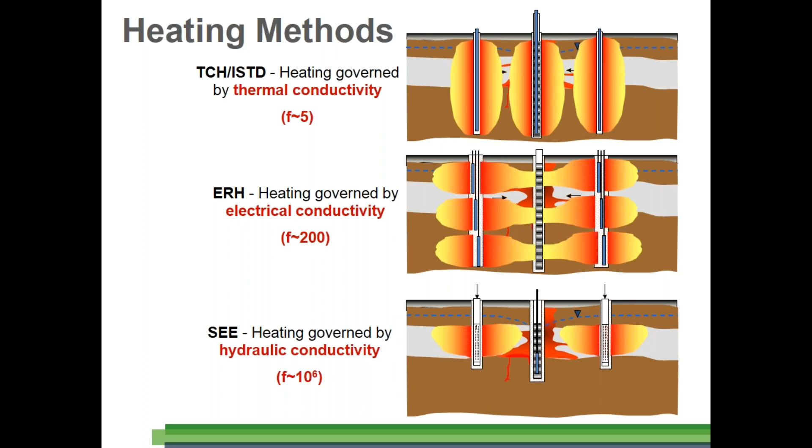Last, we have the steam enhanced extraction technology, where we are injecting steam to deliver the energy into the subsurface. And obviously, the permeability of the soil is important when we use that technology. As you all know, the hydraulic conductivity can vary quite a bit between the different geologies, so typically we're looking at variations in the order of several decades. So for the steam enhanced extraction technology, it's even more important that we fully understand the subsurface.

So that was the subsurface portion. Now we're looking at what other supporting elements are in play when we look at a thermal in situ treatment system. The well field is connected to a treatment system, an above grade treatment system that basically treats the vapors and liquids extracted from the subsurface. The treatment system can either be based on a GAC-based system, a GAC regen system, or maybe a thermal oxidizer if the mass is high.

The energy typically comes from the electrical grid, especially for ERH and thermal conductive heating. When we are utilizing the steam enhanced extraction system, the boiler typically runs on natural gas, or diesel if no natural gas is available at the site.

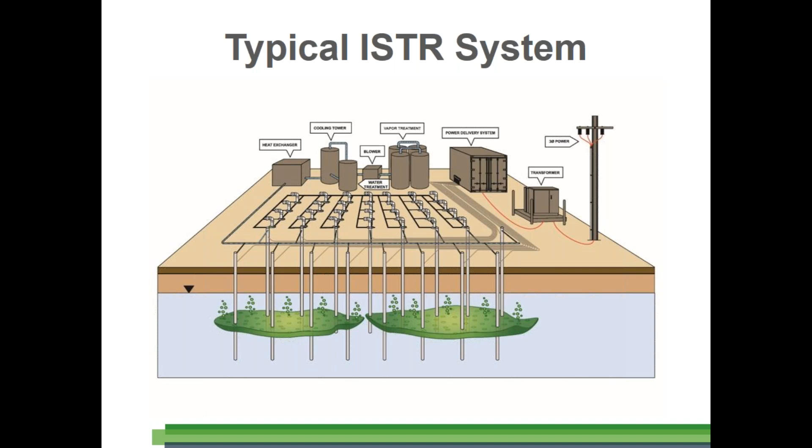The next couple of slides will briefly outline what kind of wells we are dealing with at thermal sites. The first one is the thermal conductive heating heater boring. The thermal conductive heater element is installed in a typically 3-inch carbon steel can. The annular space around the can is backfilled with grout. Sand can also be used, but typically we use grout because when we work on thermal sites, the mass are typically pretty high as well, and that's where the technology is best. We definitely don't want any migration of NAPL along the borings.

For the thermal conductive heating technology, we have an option to basically fully plug the annular space, and that's what we do when we can. Boring diameters are typically 4 to 7 inch, depending on the state regulations and the setup, and well spacings are typically in the order of 12 to 17 feet. Sometimes we extract from co-located vapor extraction screens located right next to the heaters, but most often it's actually from separate extraction wells drilled and installed between the heaters.

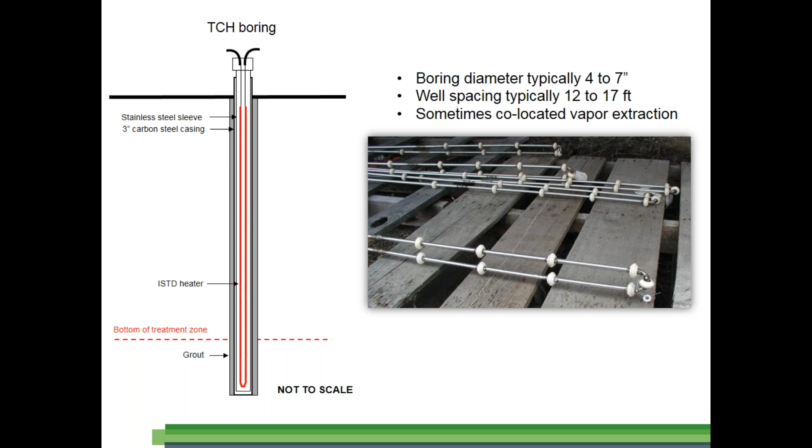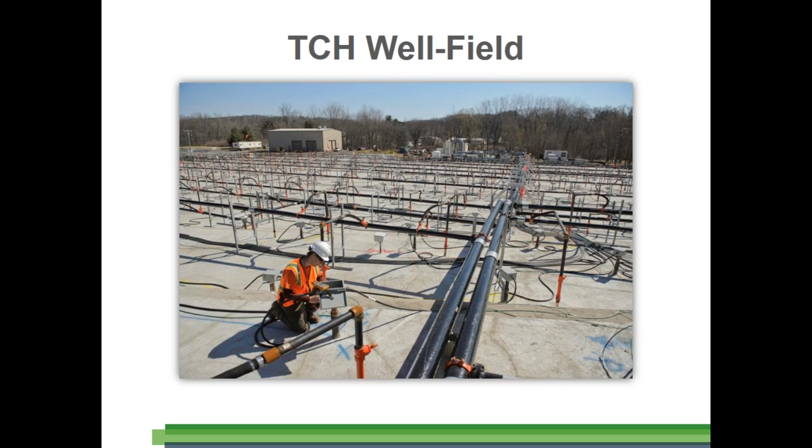The next slide shows a well field. This is one of the bigger well fields, a thermal conductive heating well field. What you see here is the orange wells are the extraction wells, and in between you have the heater borings. The manifold piping, of course, connects the well field to the treatment system.

Moving on to the next technology, the ERH technology. Here is a figure of a typical ERH boring. In this case, we are showing two electrode intervals: the upper electrode, which also serves as an extraction point, and the lower electrode, which is basically a copper plate installed in a graphite or steel shot annular space material. So the ERH wells are designed to have a big surface area such that the power can get in contact with the surrounding soils, and that's exactly why we have the graphite or steel shot surrounding the electrodes.

Boring diameters are typically quite a bit more than for the TCH wells, in the order of 10 to 12 inch, and the well spacing is in the order of 14 to 18 feet in the typical application.

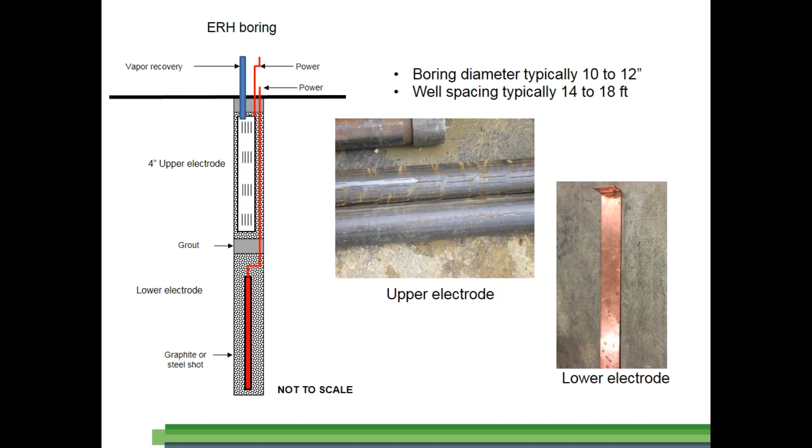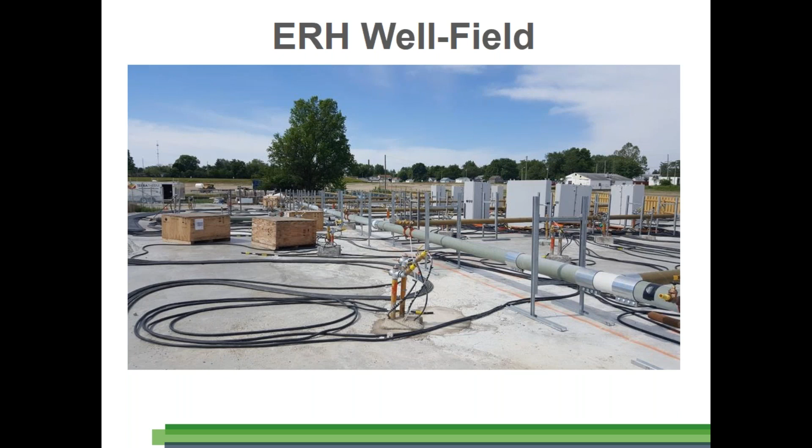This is a picture of an ERH well field, and you may realize it's not very different from the TCH well field. We still have cables going to the ERH electrodes, and we still have manifold piping to connect the extraction wells with the treatment system.

The last technology, the steam enhanced extraction technology, relies on us being able to inject steam into the subsurface. Typically, the steam is injected at very specific injection intervals that we model to fit the site. If a site is deep, we need several injection intervals as well. When that's the case, we try to install the injection screens in separate boreholes, simply because we don't want the different injection screens to short circuit in the same borehole.

The boring diameters, when utilizing the steam enhanced extraction technology, are typically between 4 to 6 inch, and the injection screen itself is typically in the order of 2 to 4 inch. When it comes to well spacing, it can be a lot higher when utilizing steam enhanced extraction technologies. We typically start at a well spacing of 20 feet, but we have been as high as 60 feet, and actually even up around 100 feet at certain sites.

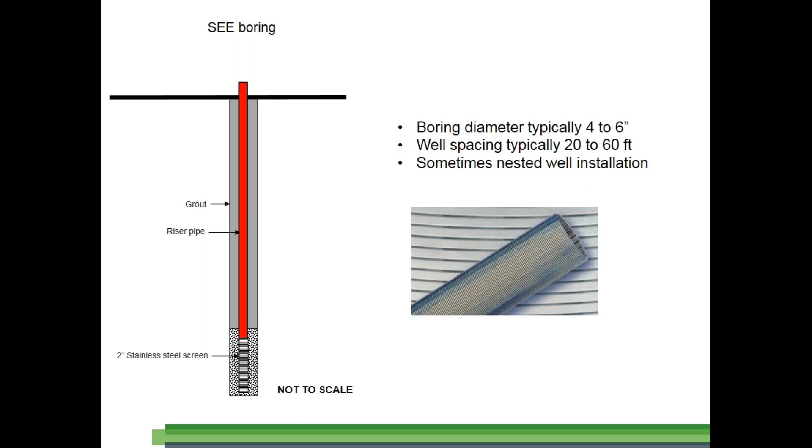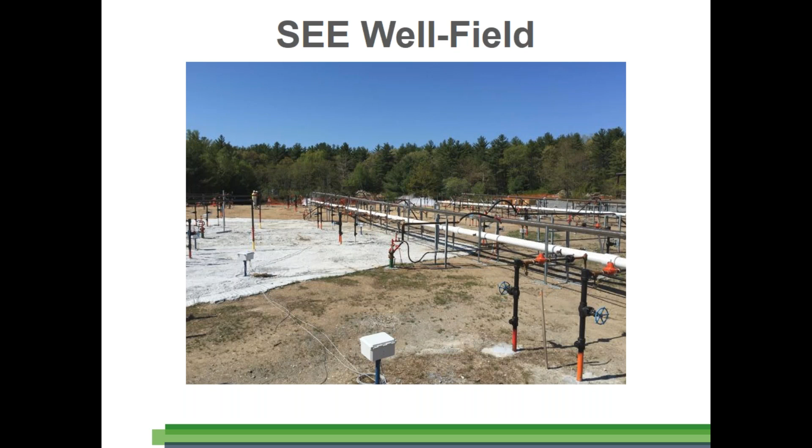This slide shows an example of a steam-enhanced extraction well field, and the orange wells in this case are the steam injection screens with a little orange steam regulator on each of them. In between, we have multi-phase extraction wells that are connected to the manifold piping. And then, other than the heating wells, we also have extraction wells.

So for the ERH and TCH technologies, we sometimes, as I mentioned before, extract directly from the borings, but more typically, at least for the thermal conductive heating technology and for the steam enhanced extraction technology, we are extracting vapors and liquids in between the heater borings.

To the very left, we have a typical multi-phase extraction well, typically constructed out of a 4-inch screen with a pump at the bottom to extract liquids, and then we are applying a vacuum to the entire well to extract vapors. MPE wells, we typically install in an 8-inch borehole.

When it comes to vapor extraction wells, they are basically the same as a multi-phase extraction well, except that they are smaller in diameter. Typically, we select 2-inch screens and risers, but otherwise it's the same, just without the pump.

And last, we have temperature monitoring points at all our thermal sites. Those are installed in a 1.5-inch carbon steel pipe. Around the pipe, we put high temperature grout such that there's no temperature smearing up along the well, and such that there's a good connection to the surrounding subsurface.

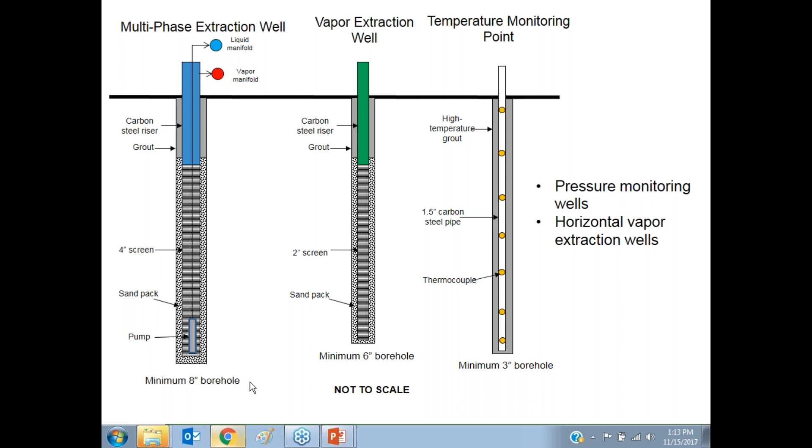So basically, four methods of drilling we're going to talk about here that will set a baseline for our case studies we'll talk about later. Most of these methods are pretty common with you folks, I'm sure. We've got DPT that we'll touch on briefly, air rotary sonic, also known as rotosonic drilling, and then another option is vibratory hammer drilling method that we used at one site in New Jersey a few years ago.

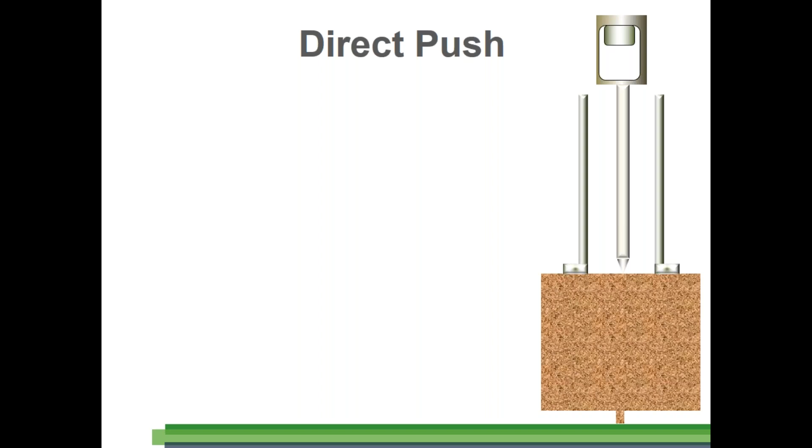So direct push, again, I'm sure most of you folks are familiar with this process. It's a flush threaded casing, pushed with a static hammer, or a static weight or percussion hammer through the subsurface. It's usually advanced, at least for thermal purposes, in support of TMP installation. So we're normally advancing a 3.5-inch diameter casing or 4-inch through the subsurface. There's an expendable point at the bottom of the casing that forces the displaced material into the formation.

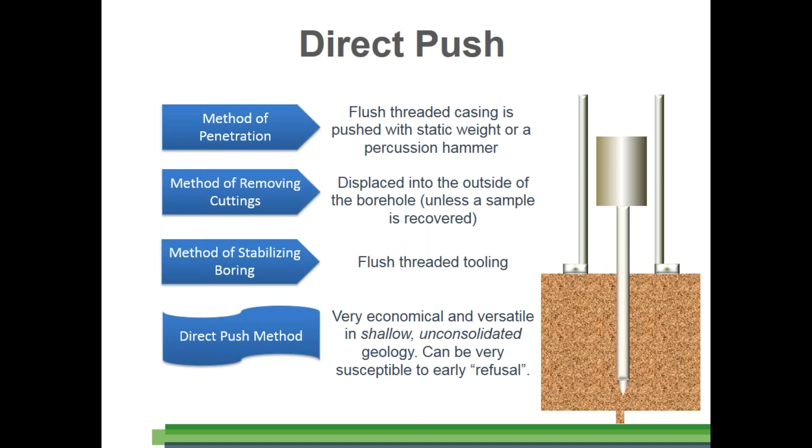And again, it's flush threaded casing, so whatever component of the thermal tooling we're setting is installed inside of a temporarily cased hole. It's very economical and versatile, as everybody knows. Geoprobes are relatively cheap compared to other methods. Unfortunately, some people may disagree, but they're most often used in shallow, unconsolidated geologies. And depending on the rig, they can be susceptible to shallow refusal.

Here's a couple photos of some DPT rigs. We've got the Geoprobe 8040 on the left and Geoprobe 78 series on the right. These are two of the rigs that we would typically use when we're asked to install thermal components. They are beefier rigs. They can both push 3.5 or 4 inch diameter tooling, which is the size that we would need.

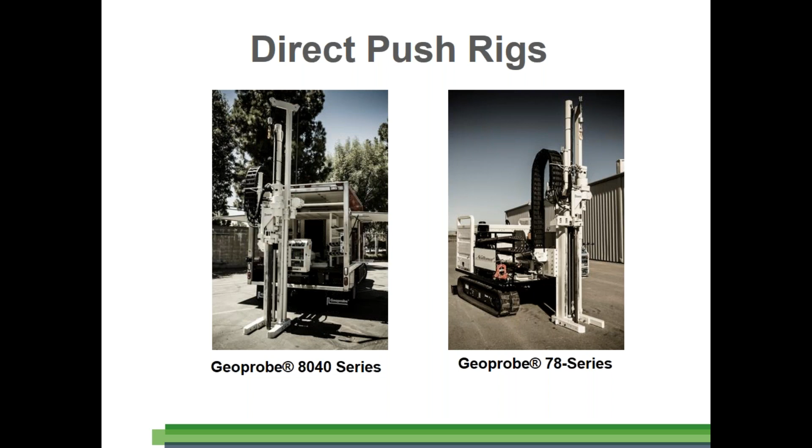Hollow stem auger, again, I'm sure you folks are typically familiar with this. You've got auger bits that claw through the formation. Formation material is brought to the surface via the auger flights. I usually have someone at the surface shoveling that material into a 55-gallon container. And the auger flights are hollow, so it's that hollowness of the augers that allows us to install subsurface thermal components.

The diameter and depths are dependent on torque as well as geology. Usually for ERH sites, we're typically advancing 12-inch diameter OD augers, which are pretty large, and they tend to be a little bit depth limited. So I always get a little leery when folks ask for 12-inch diameter augers over 30, 35 feet, depending on geology, of course.

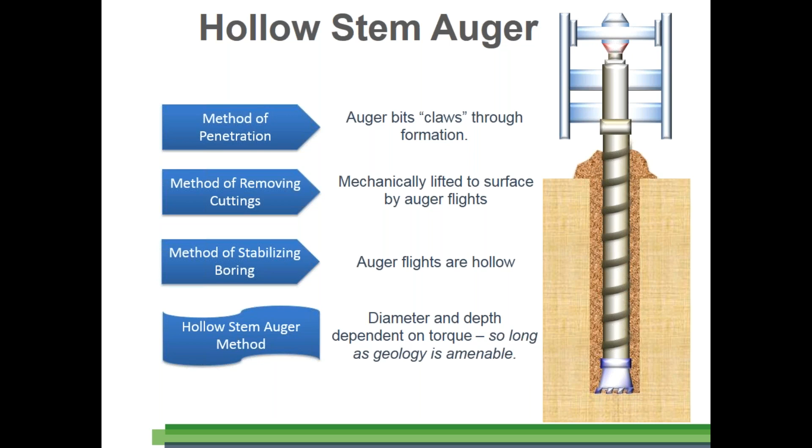Here's some standard auger rigs. They come truck-mounted and track-mounted.

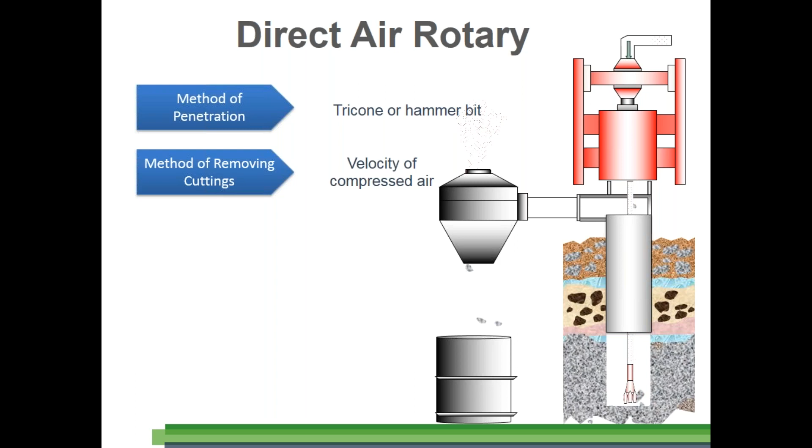Direct air rotary is another method that we typically use, obviously for rock remediation sites, thermal sites. Tricone hammer bit is advanced through the bedrock, and cuttings are brought to the surface via an onboard compressor or standby compressor. The compressed air brings the formation material to the surface, where it's sent through a cyclone or discharged directly into a roll-off container, 55-gallon drum.

The method of stabilizing the borehole is inherent to the stability of the geology, right? So we're not typically using air hammer to drill overburden material. It's usually only for bedrock, with the exception of some other air rotary methods used out west. One of those methods would be air rotary casing hammer, although ODEX is another casing advanced system that's occasionally used here in the Northeast.

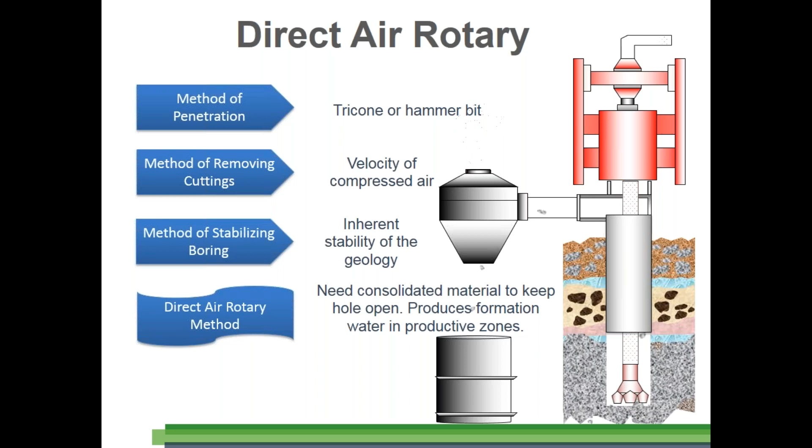Need consolidated material to keep the borehole open. That's sort of implied with the bedrock nature of the drilling. It does produce formation water in productive zones, so if you're drilling in rock along the coastal plains, you'll likely get a fair amount of water generation.

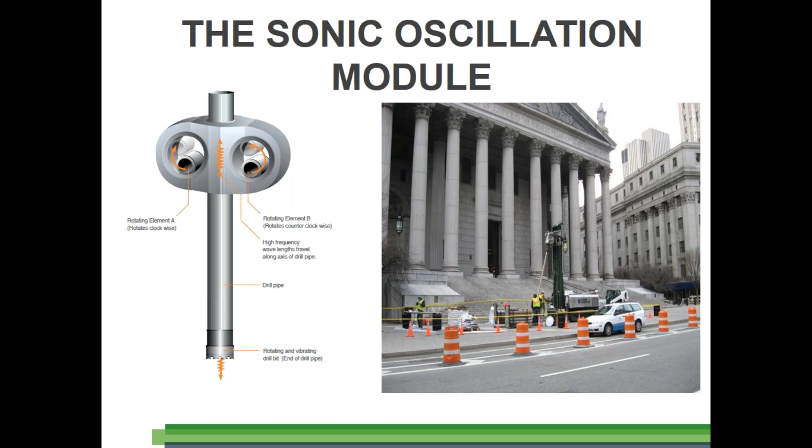That resonance is typically what allows the sonic tooling to advance through boulders and cobbles and material that typically causes refusal for augers, probe rigs, or other conventional methods.

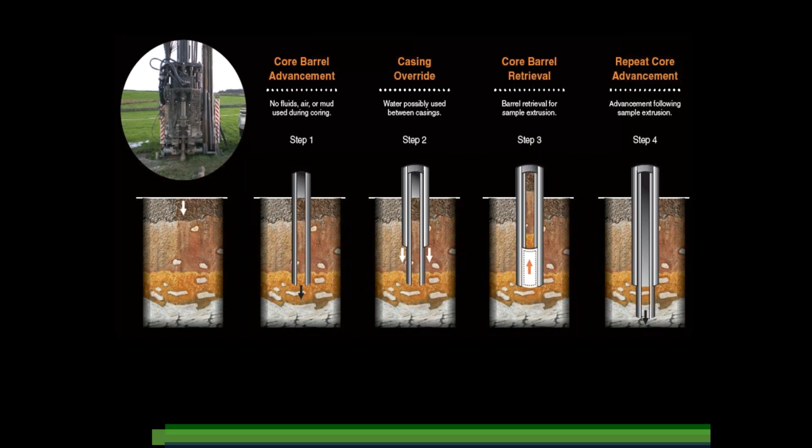It's a two-step process. You've got a core barrel that's advanced in 5 or 10 foot long runs, and then it's overridden by a temporary casing. The core barrel then comes out, or is pulled out of the surface, and is typically extruded into a polyethylene liner. Then the process is repeated. So you've got a core-case process.

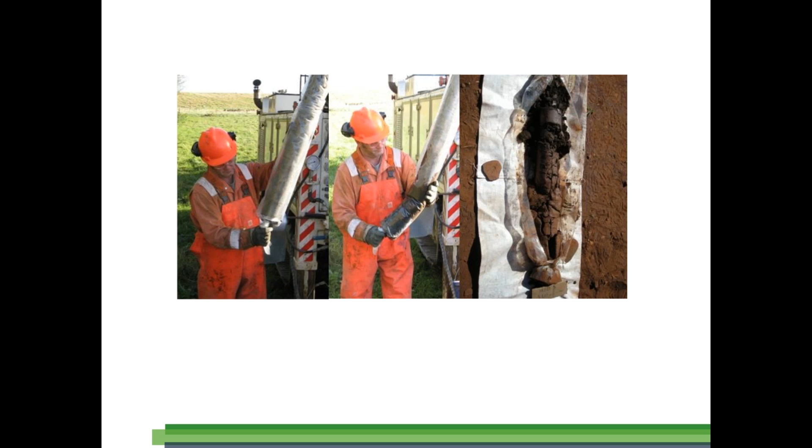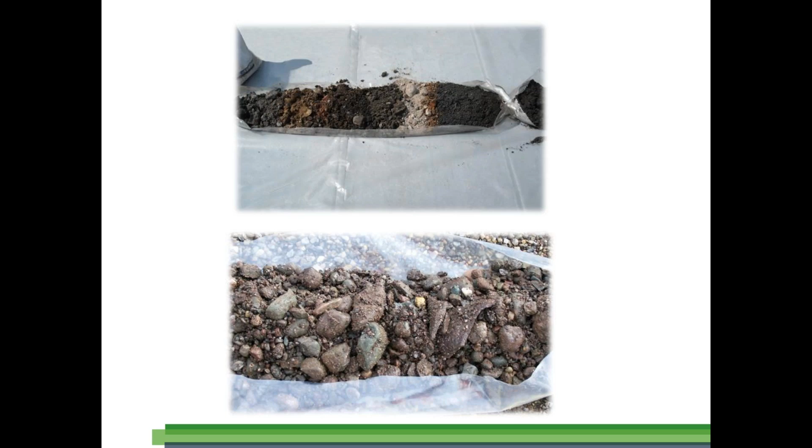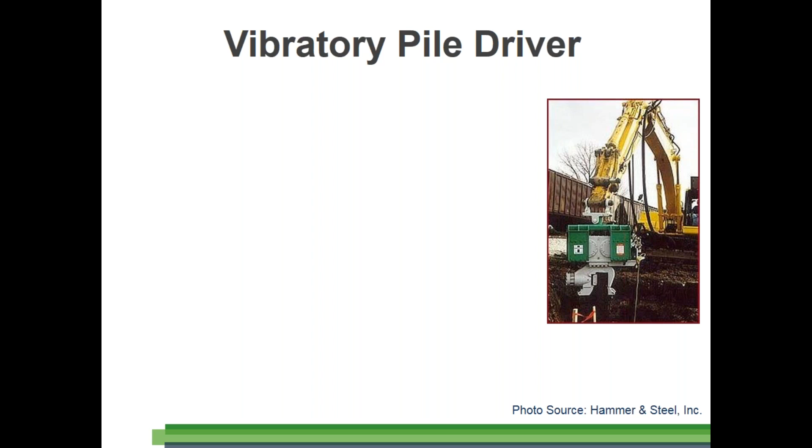Vibratory pile driver. This is a relatively new method for us, and we're really excited about it. We used it a few years ago in New Jersey. It's also based upon an oscillation module that creates high-frequency vibration. That module, in most cases, is mounted to the end of a typical yellow iron excavator. This allows us to advance tooling, heater cans, directly into the subsurface. This method is typically used for driving sheet pile walls or piles directly into the subsurface.

Obviously there's no IDW generation because we're advancing that heater can directly into the subsurface. It's direct drive, so there's no need to stabilize the borehole, and it's really economical and versatile in shallow, unconsolidated geology. The geology has to be amenable for us to use this; otherwise, we can snap the heater cans pretty easily.

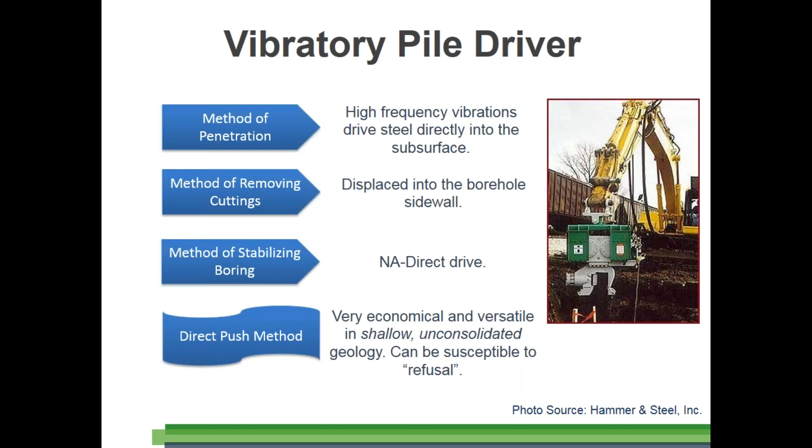You want to take this one? Yes, thank you Rob. I'll continue.

We'll continue by presenting a case study from the Solvents Recovery Service of New England Superfund site, where preventing NAPL migration during drilling was a big topic, simply because the site characterization clearly showed there was a lot of NAPL present at the site. Obviously, with the drilling and well installation, we didn't want to mobilize this NAPL into the underlying bedrock.

At the site, we basically went with a 14-foot heater spacing. What was kind of unique here was that the geology had a sand layer at the top, underlain by a till layer, and below that, weathered rock. Roughly a few feet into the weathered rock, the more competent rock was located.

Prior to the thermal construction feasibility study at the site, a lot of pushes using a geoprobe rig at a 20-foot grid revealed that the bedrock was probably located at a certain depth. What we found during well installation using the sonic rig later on is that the initial bedrock was actually the top of weathered bedrock.

With the sonic rig, we ended up tying the heaters on average 3 feet deeper into the bedrock than initially envisioned. So between the design and the actual startup, the volume actually increased by more than 20%.

So in terms of the well installation, I will hand it over to the next slide.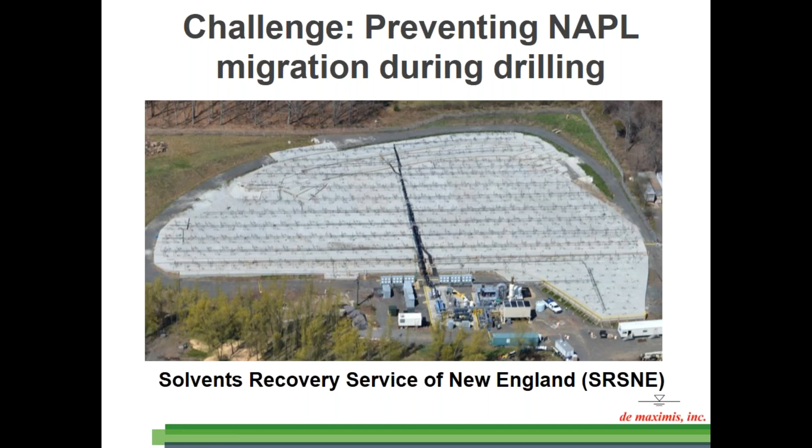There you go. So we were looking at installing a lot of wells at this site. We had a total of 607 heater wells and 551 co-located vapor extraction wells. Together with the temperature and pressure monitoring points, we were looking at more than 1,300 borings to be installed at this site.

And obviously it was super important that we didn't mobilize any NAPL into the bedrock. The technology and method we used there will be further described by you, Rob.

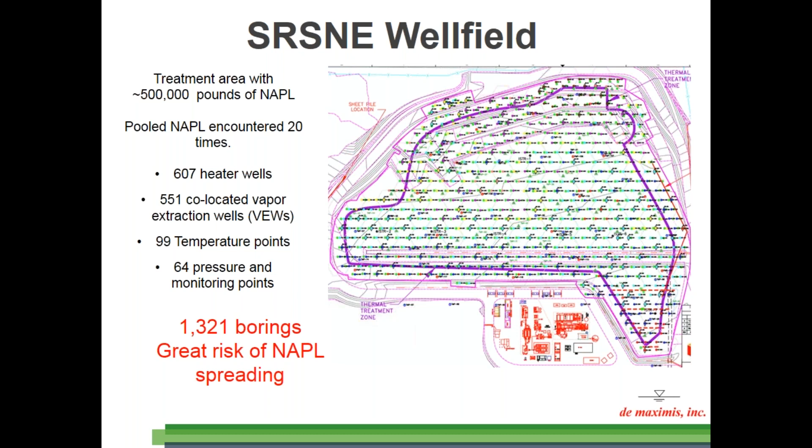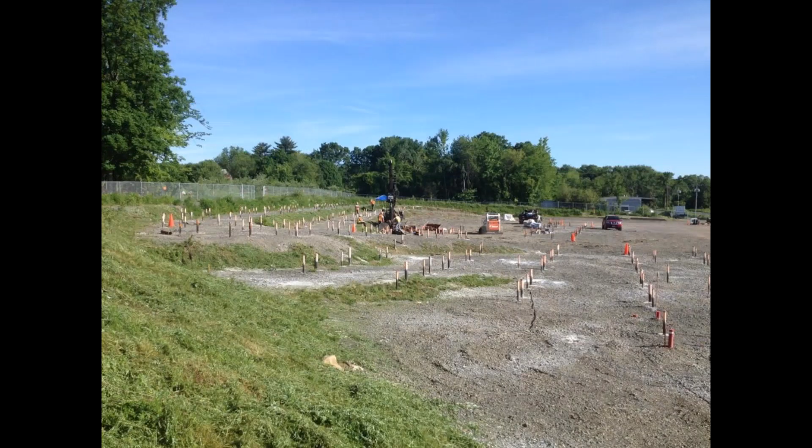Here's a general photo of the site, and Stefan mentioned one of the primary concerns was limiting the migration of DNAPL as we were advancing. So here's a diagram of some of the well installation technique that we used.

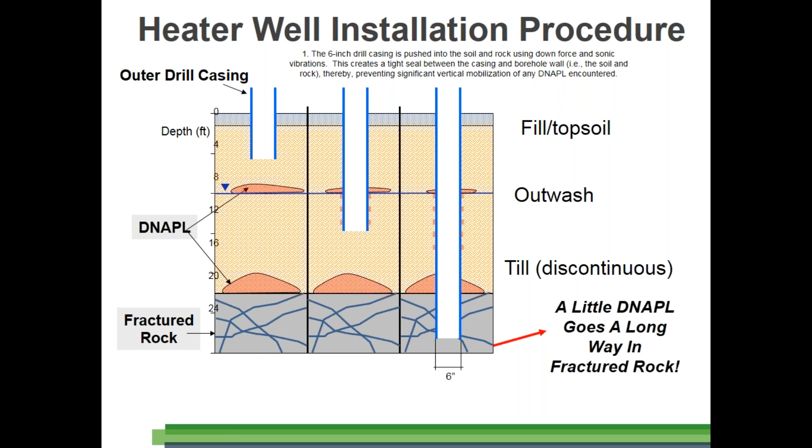So 6-inch diameter casing was advanced through the subsurface and through DNAPL zones, as well as isolation casing to isolate some of those DNAPL zones in both overburden and bedrock. Here you can see that we're advancing several feet into bedrock and limiting that migration of DNAPL into rock.

One of the advantages was that as we vibrated the sonic casing out of the subsurface, we thermal-grouted as well, and that vibration caused the thermal grout to stitch itself into the overburden and bedrock formation, ensuring there wasn't any bridging and a continuous seal. Here's another image of the casing being pulled out of the subsurface and the grouting of the annular space.

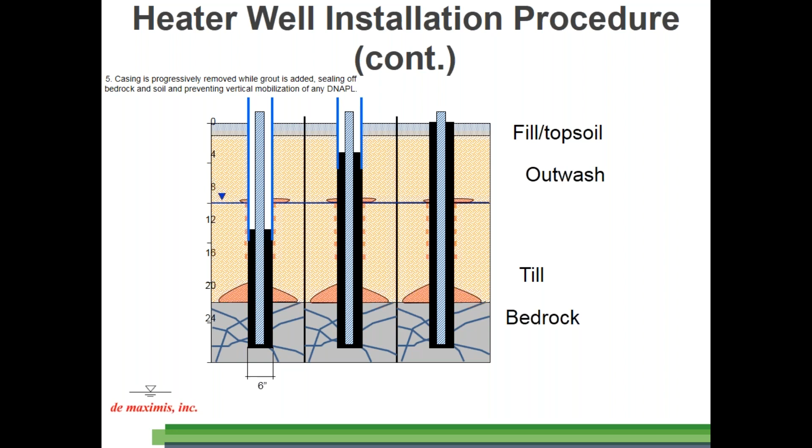One of the other concerns was urban fill on site. We had known there were prior buildings on site that had been razed over time, and due to other excavations on site, we had seen some concrete fill present up to 8 inches thick.

Sonic was chosen because we knew it would be able to advance through that urban fill and minimize any delays in production rate.

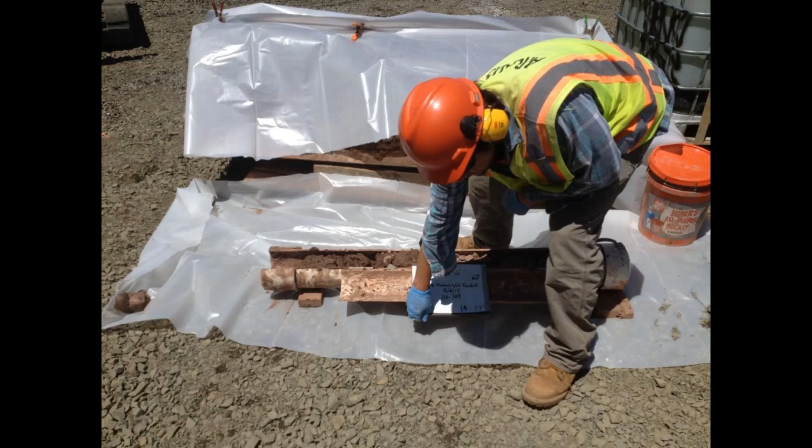One of the other advantages was that we could collect continuous cores of the subsurface, so we could really verify where the top of rock was, as well as look for any presence of DNAPL in the sample core.

As I mentioned, we could get continuous cores of the rock itself, or of the overburden and rock. Most of the sampling we did was pretty basic field sampling for DNAPL, using the jar shake method and also having a PID on site.

If we did find a presence or potential presence of DNAPL in the soil core, we were able to collect a groundwater sample from the base of the sonic casing.

It's not the cleanest method, but because we were able to drill dry on site - I forgot to mention that earlier, that we didn't use any water or drilling fluids when sonically drilling - that was a key component of ensuring we didn't cause any migration of DNAPL during the drilling process.

So these photos show us installing some polyethylene tubing to the base of the cased hole and pumping that formation water via peristaltic pump to verify whether there was in fact DNAPL, or at least recoverable DNAPL.

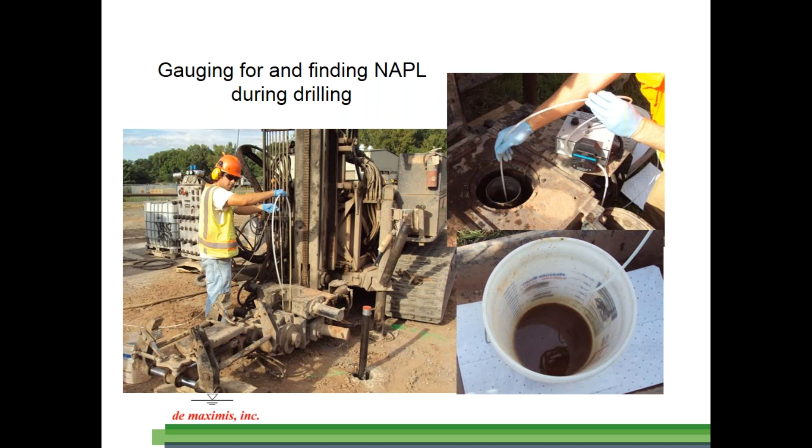Another advantage was that we were able to directly discharge the IDW into 5-gallon containers or a skid steer bucket. In this photo, you can see that in situations where we didn't need to characterize the borehole or the soil, we could discharge that core barrel or its contents into the 5-gallon bucket.

Certainly better containment than an auger method, where, as most of you know, those cuttings may be brought to the surface, and you've got a helper hand shoveling that material into 5-gallon containers.

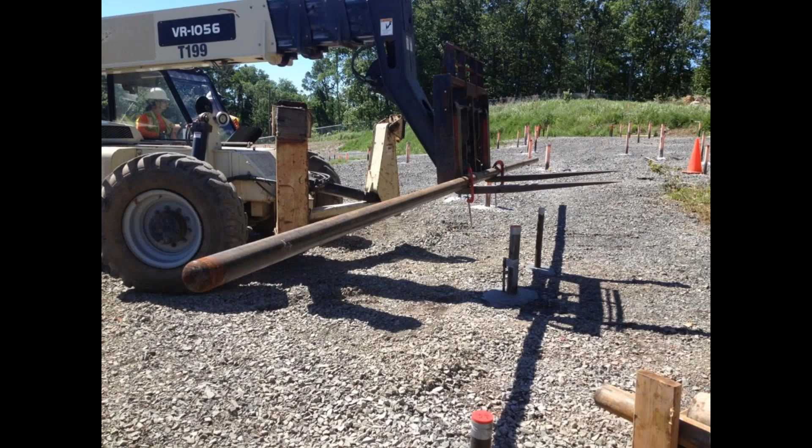Here's a plug for Sue Bruning and sustainability. Because we were able to verify where the top of rock was, we could minimize any excess steel or waste steel.

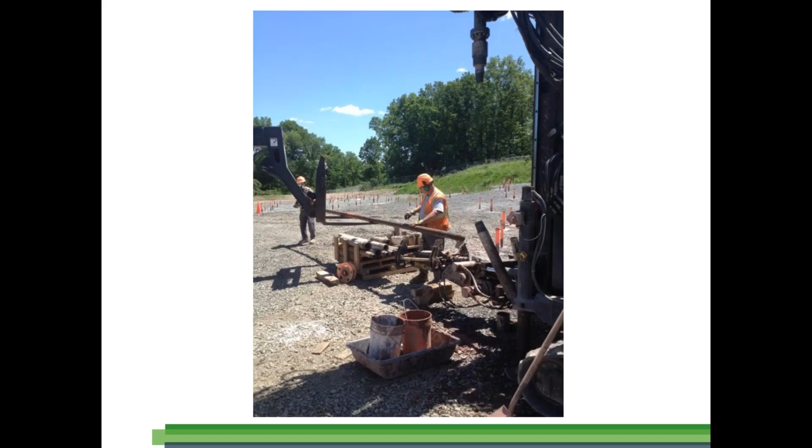So we fabricated all of the heater cans on site and installed them using this lull in the Minisonic loader shown here in this photo.

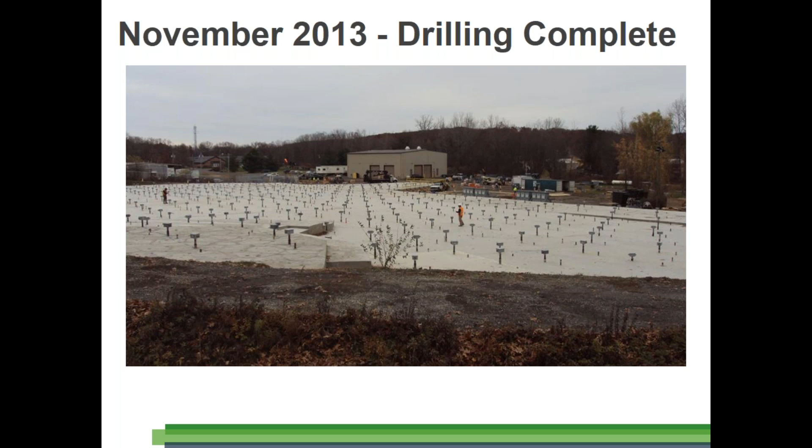Here's a photo of the site after construction, right Stefan? Do you want to take it? Yes, that is actually a picture of the well field prior to installing all the manifold piping.

All right, so the next case study we brought today is basically the Teterboro, New Jersey site, where the challenge was this was a very big site. It was a 3.2 acre site, and with the wells that we needed for the thermal remedy, this is another thermal conductive heating project.

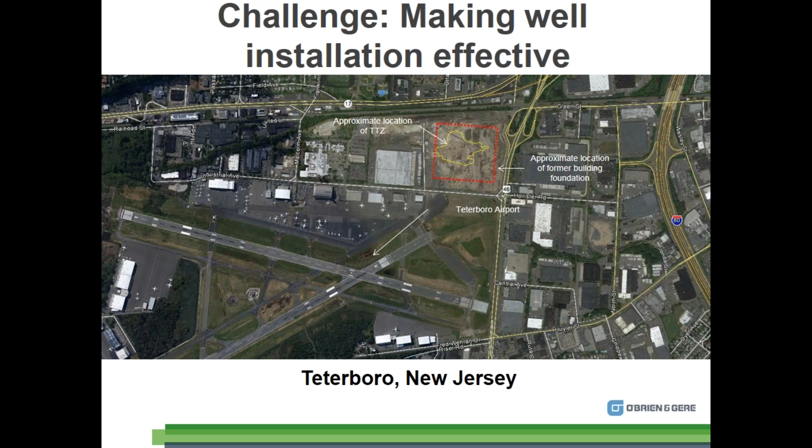We actually ended up having to install nearly more than 1,000 borings, and most of them were heaters. 907 of them were heaters, but we also had some multi-phase extraction wells and some pressure monitoring wells and TMP strings. At this particular site, we were dealing with a fill layer underlain by an 8 feet sand layer, and below that we had silt and clay. So the bottom of the site at certain areas was 40 feet below grade.

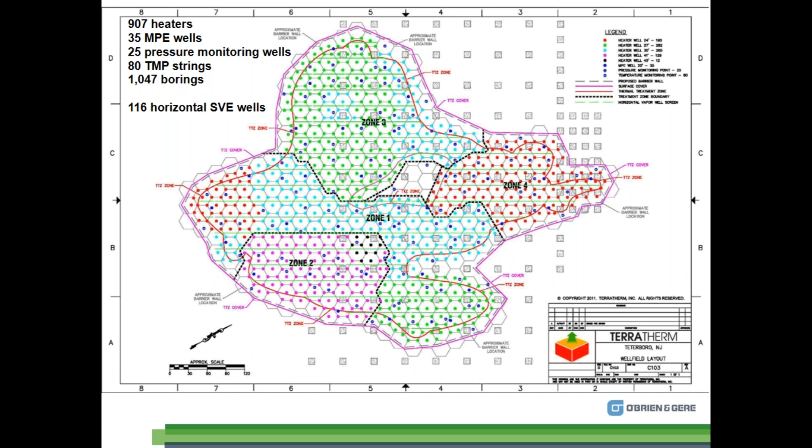Since, as discussed previously, the TCH heater borings don't require annular space, it was an obvious choice for this site to try to direct or vibrate the wells down, simply to cut down on IDW and bring up the well production. So Rob, I know you have some details about that process.

Sure. So for Teterboro, TerraTherm subcontracted DA Collins out of New York to use that vibratory hammer that I mentioned earlier to advance some of the heater borings. This photo here is of the vibratory hammer that we used, also installing pile drivers for a sheet pile wall.

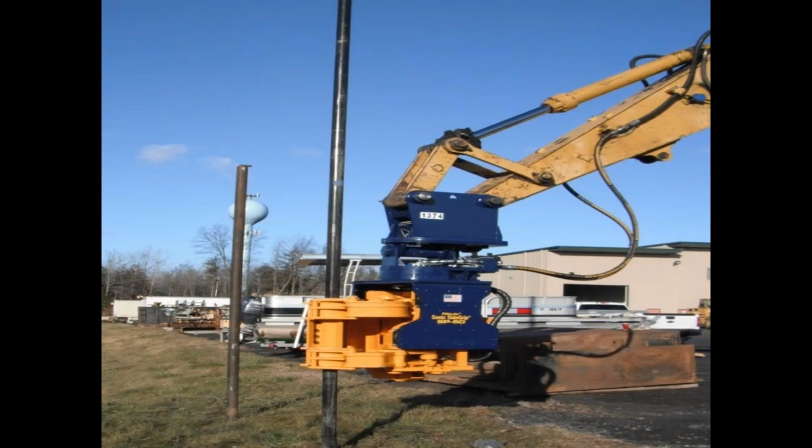Here's a photo of the oscillator, the vibratory hammer, with a sidearm grip that was advancing these 3-inch diameter heater cans directly into the subsurface. So most of the heater cans were installed using the vibratory hammer, and it was unique for the TCH heaters. We didn't use them for any of the other subsurface components.

It was certainly a much faster production rate than any other method we could have used. Our production rate was roughly 500 feet per day, and obviously there was minimal IDW generation because these were able to be driven directly into the subsurface.

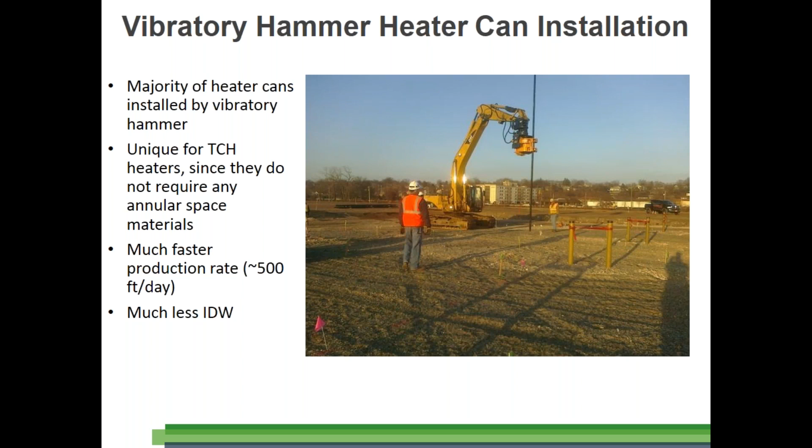We did have some issues on site. We had some breaks at the welded joints. The breaks occurred obviously because of the vibration. The vibration snapped a couple of those welds, and we did have some overheating of the hammer, which caused some delays on site.

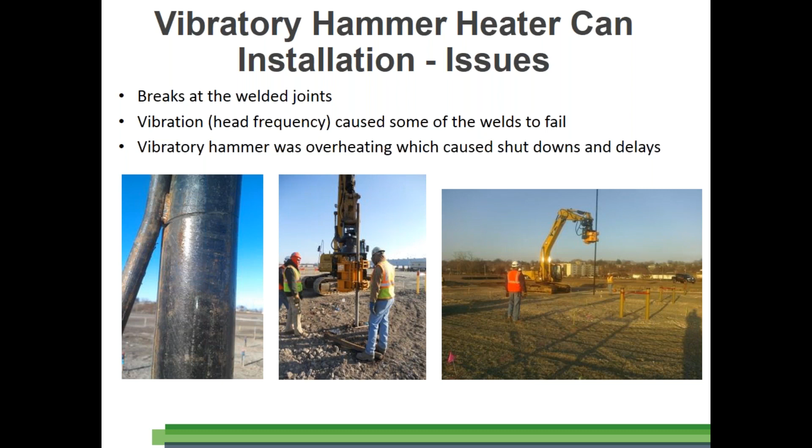There were subsurface footings on site that caused refusal, but if we did hit refusal, we offset roughly 1 to 2 feet adjacent to that original borehole and tried again. And if we hit it a second time, we reserved that hole to be completed with a sonic rig, which later came on site to basically mop up any remaining holes.

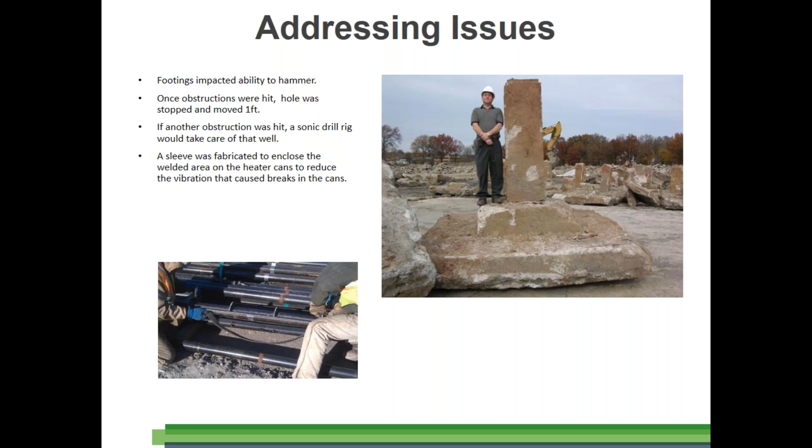We also fabricated a sleeve to enclose the weld joint on each of the heater cans. This helped reduce the vibration that caused some of the breaks in the can. So we obviously had substantial cost savings with this method. 90% of the heaters were installed with this vibratory hammer, and the remaining approximately 10% of the cans were installed using sonic. The final cost of the heater can installation was less than half of what it had been if we had used sonic drilling for all of the heater can installations, and the net result was roughly $500,000 in savings for the client.

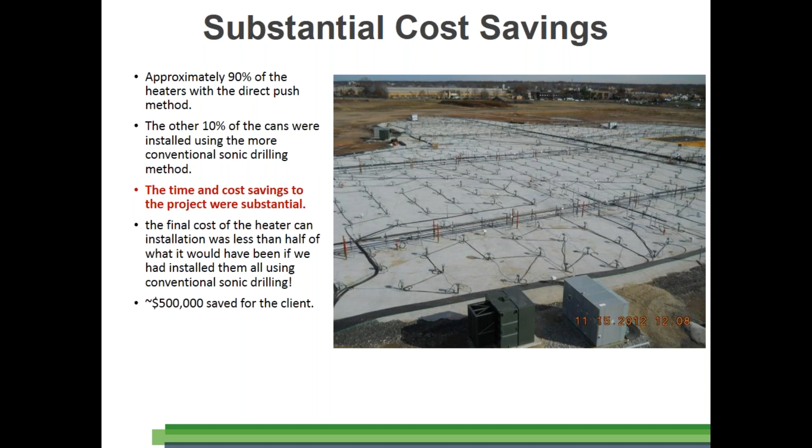Stefan, you want to talk about hot soil sampling? Absolutely. So the last topic of today's webinar is basically hot soil sampling, and obviously this is a topic that comes up on a lot of our sites because that's how we document that the thermal remedy is complete and that we are ready to turn off the system and document that we have reached the goals.

When it comes to hot soil sampling, it's of course super important that none of the VOCs that may still be present in the soil samples are lost during the sample process. So typically we prefer to collect intact cores to limit any vaporization of contaminants during the sampling process. The samples are typically collected using a core barrel type sampler, and we typically collect the samples in stainless steel sleeves or Teflon sleeves. The length and diameter of the sample tools varies from drill rig to drill rig, but we try to limit the length to 5 feet, simply to make sure the quality of the samples is high enough, and we don't mix it all together.

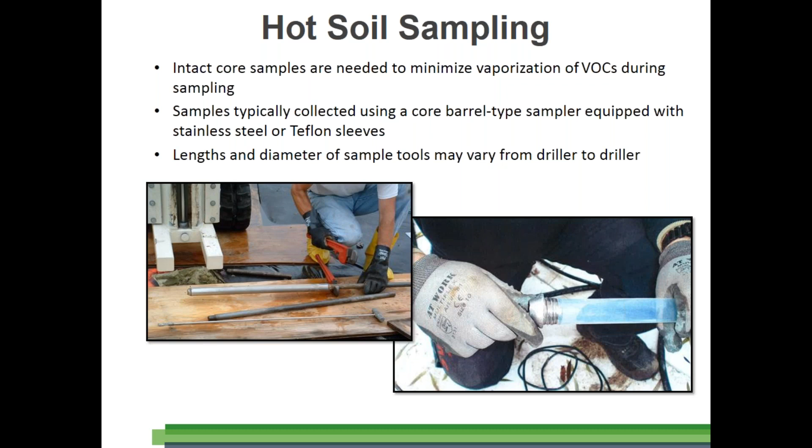In terms of sample collection, it's very similar to what you would do on a cold site. The core barrel is advanced to the desired depth, the samples are collected, and the sample is brought to the surface. One thing we see a lot is that it's hard to get full recovery, and typically that's due to the fact that no matter what thermal technology we use, we will evaporate some of the pore water and decrease the saturation, and in some instances the soil will also be harder after we evaporate that water. But in general, standard drilling equipment is utilized, and bringing the soil to the surface is relatively straightforward, just with a bunch of hot work procedures, of course.

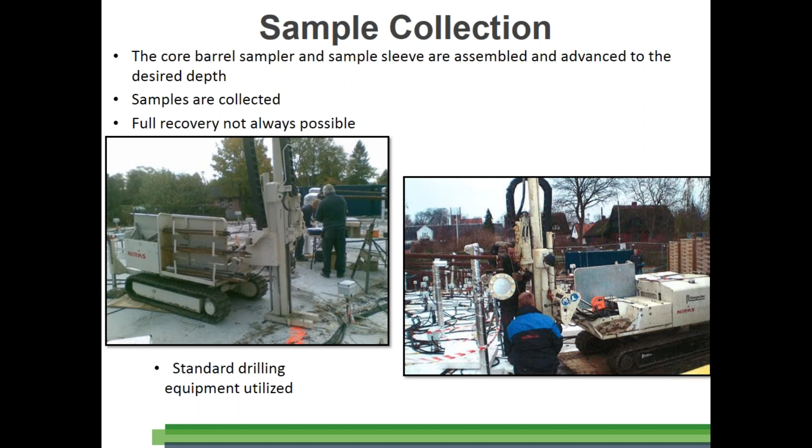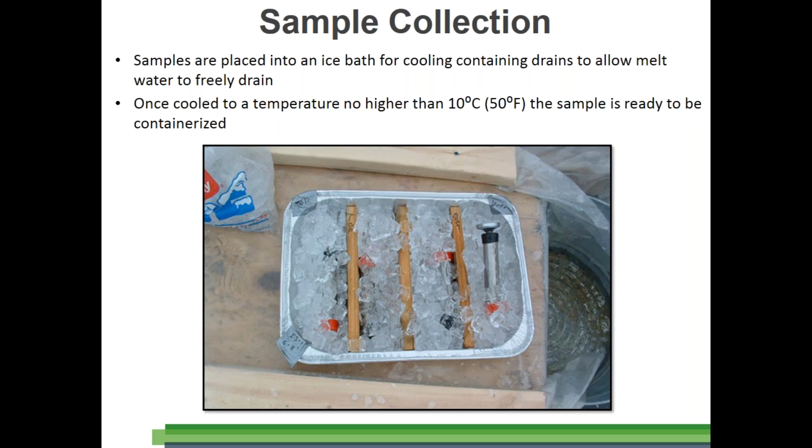Once the samples are brought to the surface, now the fun begins. First step is to cap the sample, of course, and make sure that we don't evaporate the chemicals as discussed before. We then cool down the sample, typically in an ice bath like shown in this picture. We are aiming to cool the sample down to at least 50 degrees Fahrenheit or 10 degrees Celsius, since that's close to ambient temperatures in most regions. At that point, we are ready to collect the samples.

Sometimes we basically just ship the samples in the sleeves directly to the laboratory. Sometimes we take the soil out of the sleeves and put it in bags or jars. And at some sites, commercial systems like the En Core system or sample system are used to collect the actual sample.

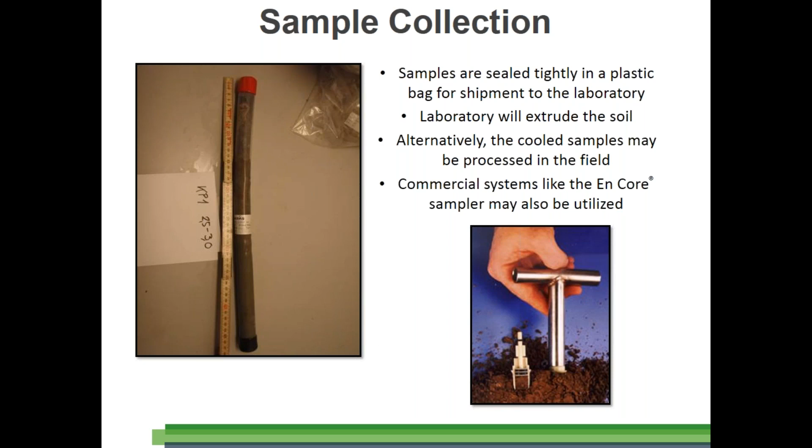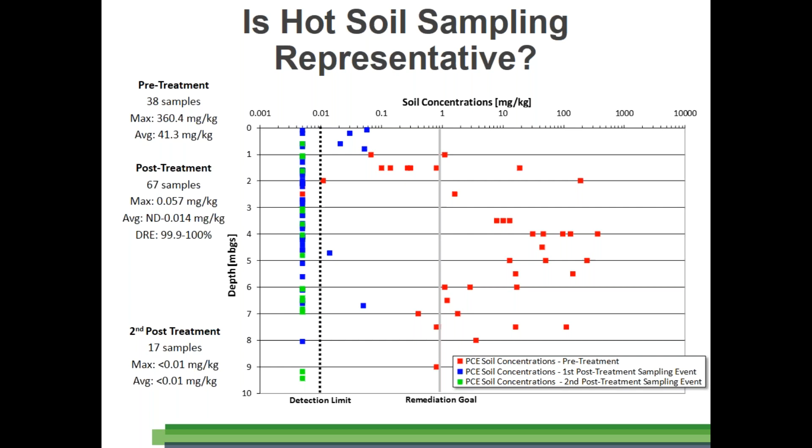To wrap up this webinar, first of all, it's important that there's a good dialogue between the thermal vendor and the drilling contractor, and of course the client and client consultants, about how to install the well field. The drilling cost of a thermal project is typically between 10 and 20% of the total remedy cost, so it's important that it's efficiently performed.

When it comes to selecting the right drilling technology for a given site, it definitely depends on the heating technology selected, but geology, boring depth, boring diameter, and the location of the water table all play into the drilling technology selection. As Rob indicated, if we know there's a lot of refusal in the upper portion of the site, we tend to lean towards sonic, because it's a lot easier to get through concrete slabs and so on using sonic.

For thermal conduction heating and steam enhanced extraction projects, we typically use sonic. First, because we see a higher production rate, and second, because the technology is less likely to be stopped by refusal. We also generally create less IDW using sonic, and from a practical standpoint, bridging when setting the sandpack or grout plug in the wells is less likely to happen due to the sonic vibrations.